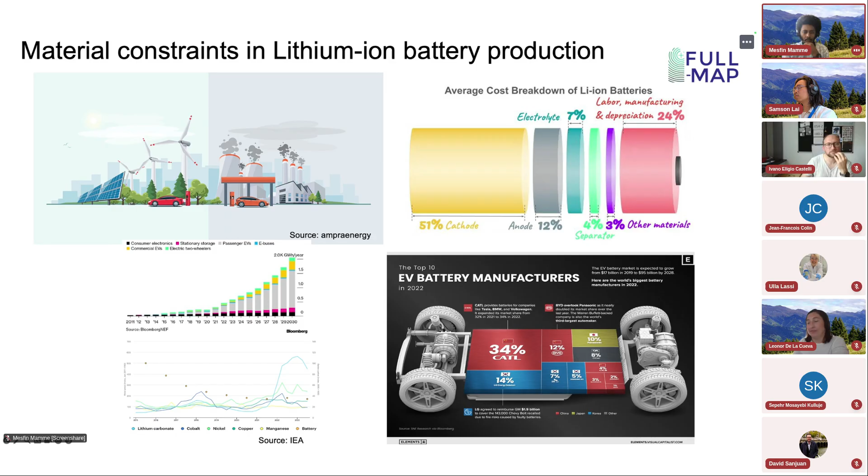And of course, this means that we have to find an alternative ultra high performance battery, but not only ultra high performance. Obviously, it should be lower cost and sustainable, very urgently. That's a really important point we are going to address in this project, or entirely in Battery 2030. And the question is how we do that.

If we follow the traditional approach, either we need to be magicians, which means basically we are lucky enough to bring a solution in a sudden way, or we should follow the trial and error approach, which is the conventional approach everyone is using, including us in our day-to-day research activity, and which costs us a lot of money as well as time. This has been already evident from many discoveries that transferred from research to industrial application, which took much longer than we anticipated.

For example, the lithium-ion battery took more than two decades from invention to commercialization, meaning that to see the next discovery, we have to wait another maybe two to three decades, which we cannot really afford. If that's the case, we have to really reinvent the way we invent this lithium-ion battery.

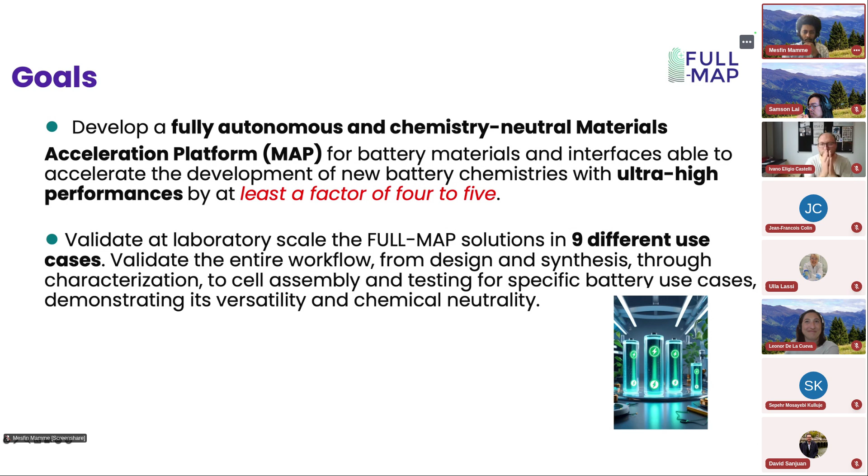Eventually, this materials acceleration platform should be generic and versatile enough, and this will be tested by different use cases in order to ensure the transferability and usefulness of this platform in general. When it comes to how to realize this, this brings us to the overall approach.

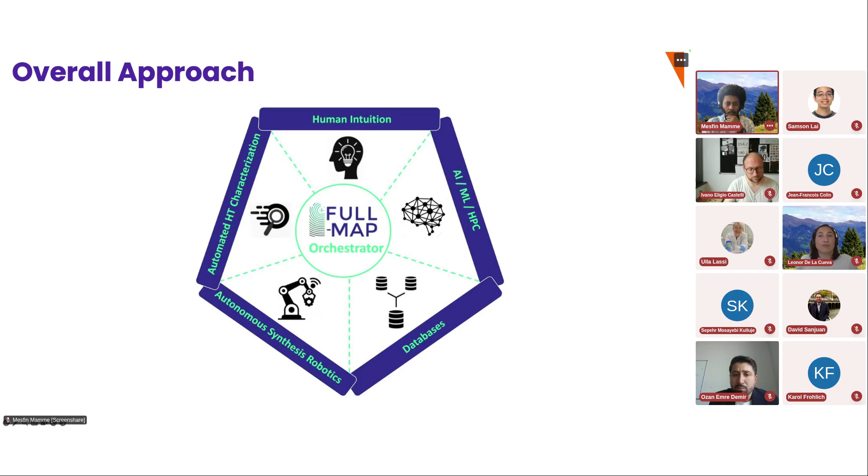As FullMap, we will develop a broad spectrum of innovative solutions in the field of AI orchestration, machine learning, computational design, modular autonomous synthesis, robotics, and advanced characterization towards a versatile, modular, fully integrated, autonomous, and chemistry-neutral materials acceleration platform. This also integrates the interoperability of data infrastructure, which is really the core part of the FullMap project. And we start by taking what has been done in the previous project called BIG-MAP.

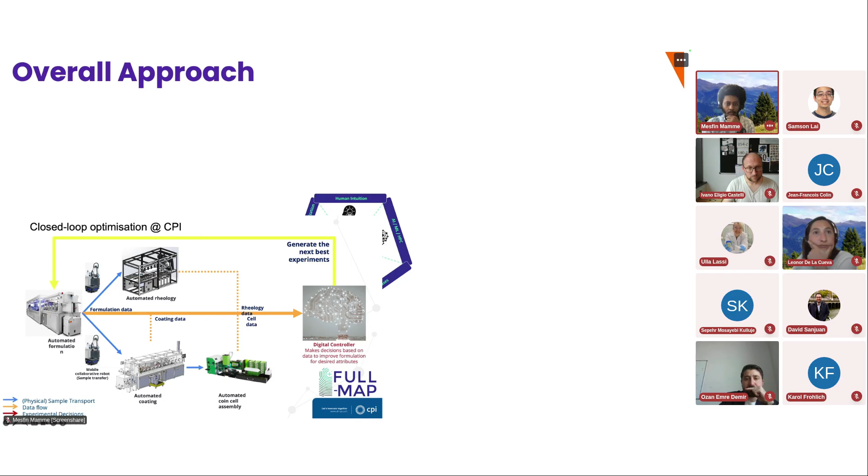So at every step, everything is done by the robot, and the data will be fed to our AI orchestrator, and the AI orchestrator will be trained and will give the next steps of the experiment for better performance. For example, here is a small movie of how it's done in reality. You have your robot and all the ingredients, and the robot is making the samples in a very fast and efficient way with minimum error.

Just to give you a perspective, with manpower you can produce one or two samples within 2 to 3 days, but in this case you can produce more than 241 samples, or formulated electrodes at different configurations, per day. So this is really fantastic. This will allow us to accelerate the process much faster.

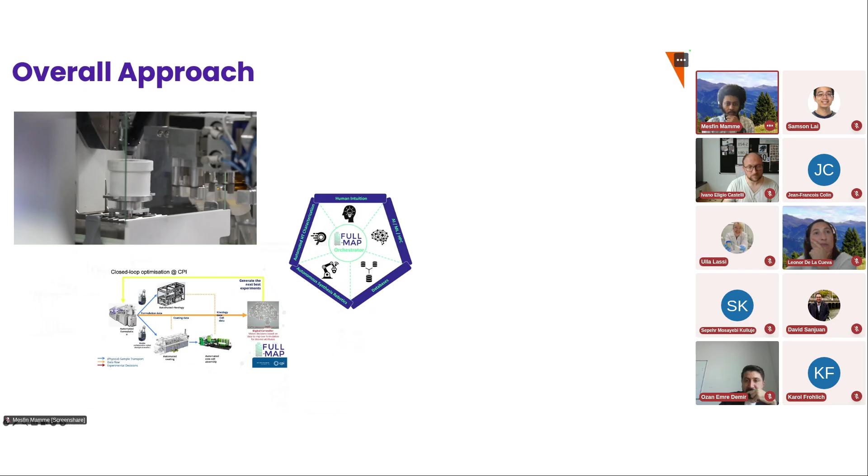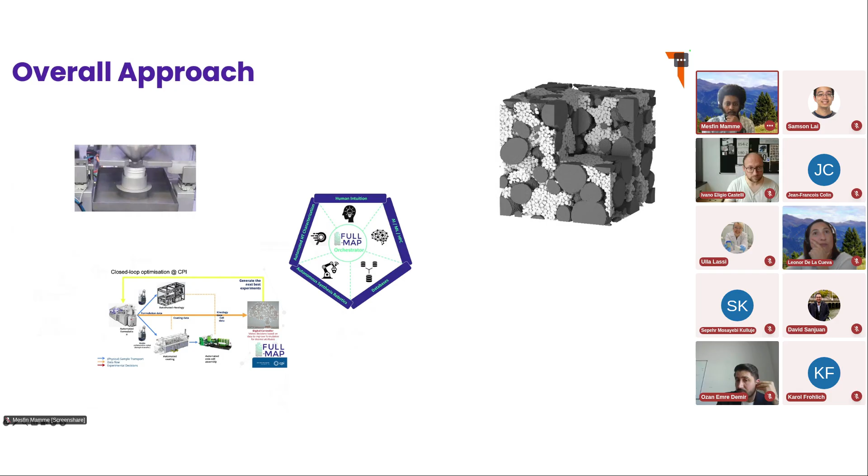At the end of the day, the idea is the AI will learn how to formulate this electrode, and eventually it will come up with a solution saying, okay, this is the performance of a certain combination of our ingredients, and then it will send a message to the robot, and the robot is going to synthesize it.

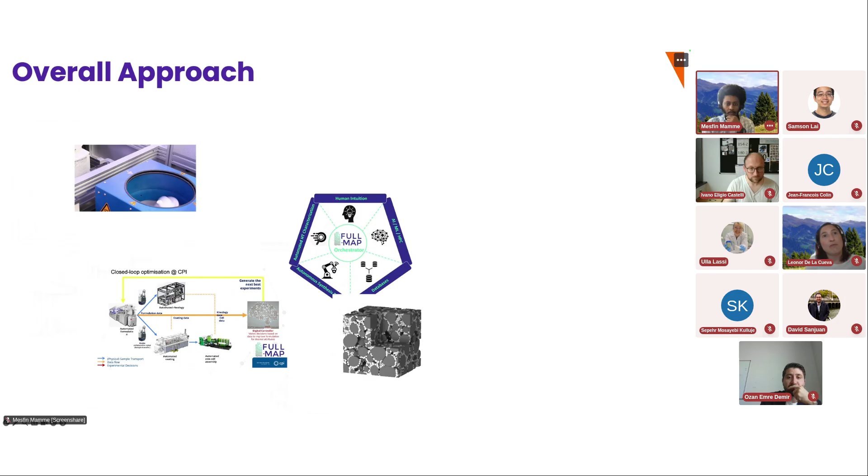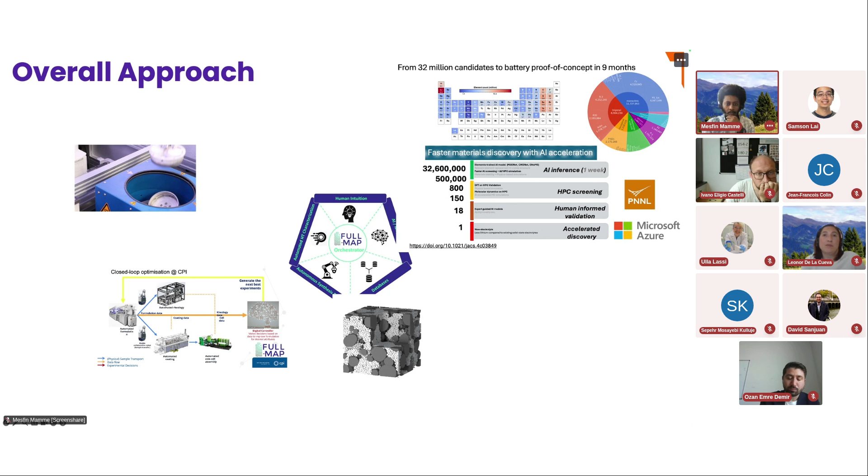On the other hand, we recently saw from a publication that by integrating this automation process with an automated simulation approach, we can come up with the best solid-state electrolyte. For example, out of 32 million, we can have these 18 candidates that are really superior to the ones we know in general. So that's the second thing we are also trying to address in this project.

On the other point, of course, we try to really combine AI, with its precision and speed, with the insights of humans.

So the idea is to use the best of the two worlds. It's not really to replace humans by robots in this project. So the ultimate goal is really to solve this critical challenge with the best approach. Of course, in order to achieve this ambitious stuff, you have to have a lot of infrastructure and a lot of people, a lot of expertise and interdisciplinary expertise, obviously.

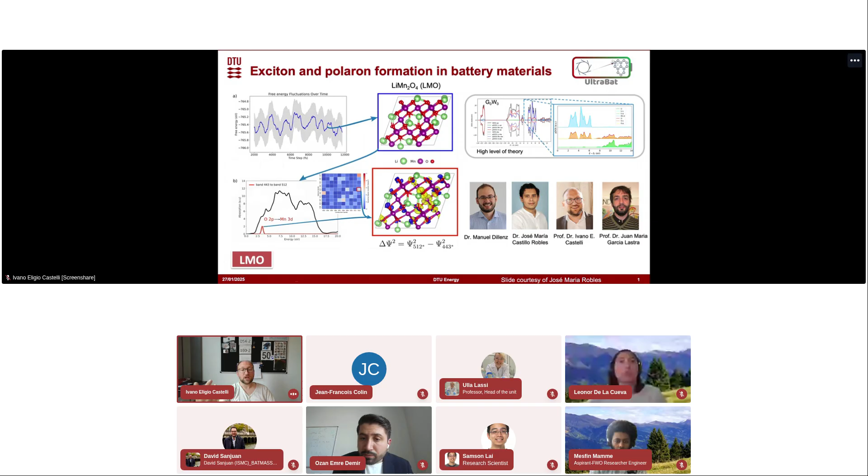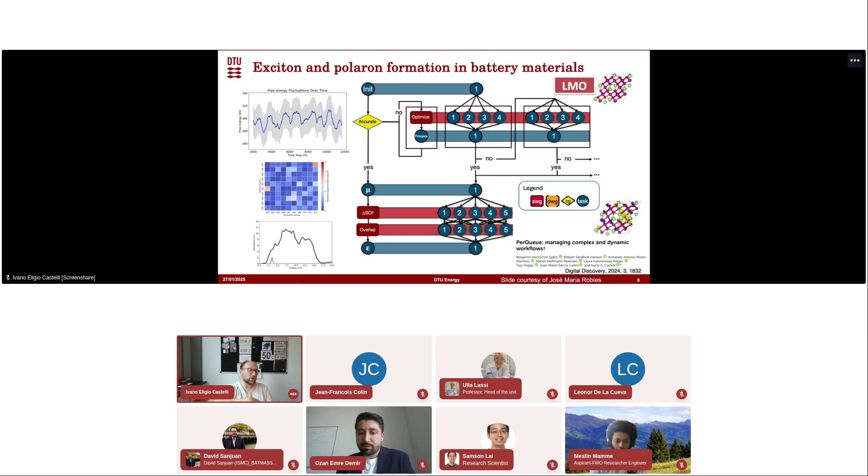And everything starts at the atomistic scale, where we do high-level density functional theory to understand how the polarons are formed and how the polarons and excitons in general move in the crystal. And to do that, we use autonomous workflow managers, which allow us to orchestrate all the simulations in an automated fashion, where we go from the most common relaxation to very advanced simulations, where we calculate how the polarons really are formed and how they move in the system.

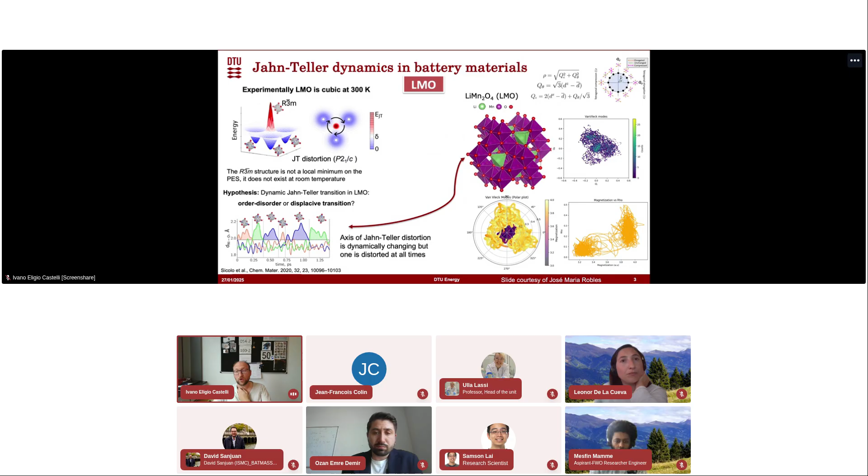Then you can look at whether there is an order-disorder or displacive transition, how the polarons change at different temperatures, what kind of charge transfer you have. So you can see here, for example, in some of the Van Vleck modes, when you go from +3 to +4 charge, you can assess whether the polaron is here or has moved somewhere else.

And then it's important that we combine this information with experimental input. For example, we can get structural information from XRD. Again, here we use very pure single crystal samples and very accurate experiments, because we want to correlate very idealized experiments with a theory that is as good as possible, right?

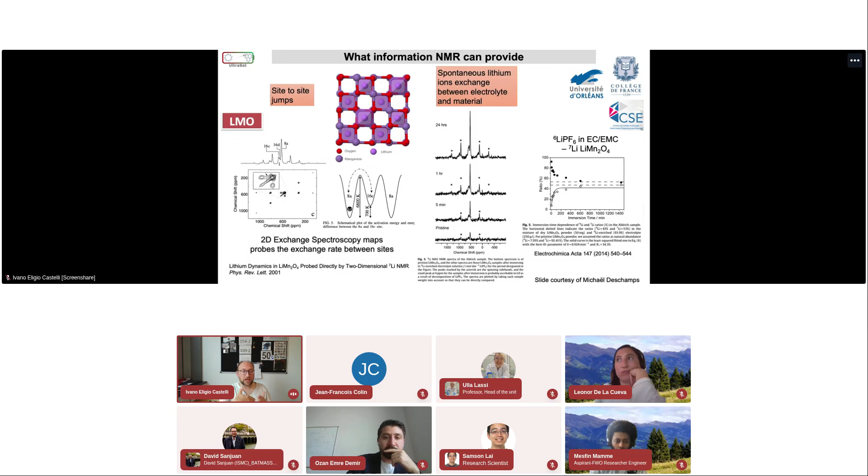And again, we can look at where the peaks of the structural information of the material are during charge and discharge, at different lithiation stages, and then directly correlate them with the theory that we are developing. We have been at beam time a few times, which allows us to really understand these fundamental properties. So here we are shifting from a more explorative project to really understanding what information about the battery interface we are missing and developing that.

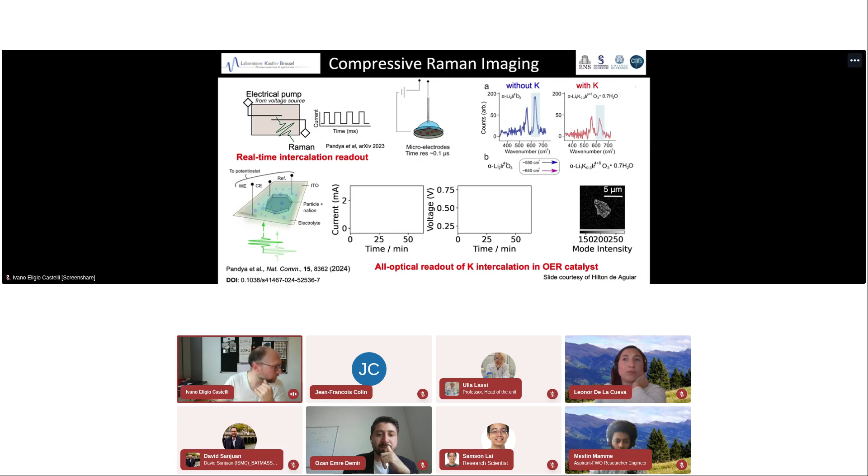Yes, of course, one of the techniques that we are using that we believe is really powerful is compressive Raman experiments, but also combined with pump probe techniques, where we inject electrons into the system and look at how the system behaves. So going beyond just charging and discharging, we're actually forcing more electrons into the system, which is a unique technique that we can use in this case and combine it again with different levels of simulation to have a one-to-one map between the two.

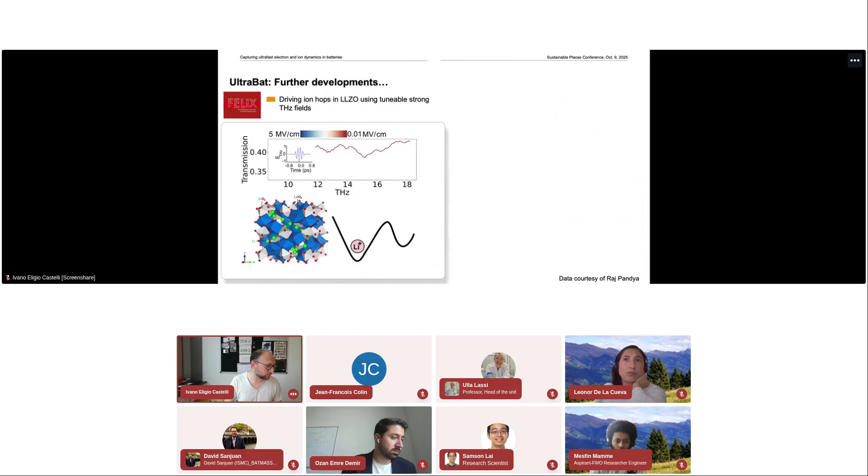Just in the interest of time, I'm skipping to here: where are we and what we want to do. So we are working on two main candidate materials, LMO and LLZO, and really trying to understand their fundamental properties. That is something that we feel is a little bit missing in the community right now. Complementing different techniques from experiments, theory, going to large-scale facilities and so on.

We have had two X-FEL beam time slots this year, so we are analyzing the results and combining them with the theory that we are developing. We have also used one of the Hop-On projects that the European Commission allows to get Peter from Slovakia involved, which is a good way to include more partners or more expertise in the project. Yes, and that's more or less it. And these are the people that are involved and have been part of the project so far.

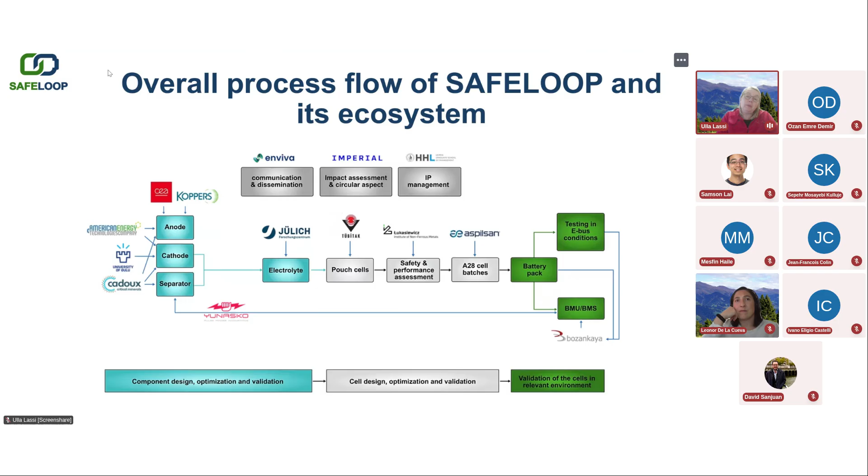There is, of course, a lot of work and coordination with the material flows, because, as you see, the whole globe is covered, from the United States, Europe and Australia. And that has been, to be honest, a challenge for the project. Material flows, and especially the lack of recycled material content, which was a little bit of a surprise during the project. Then we also have a lot of communication activities and activities related to LCA, circularity evaluation and IPR issues in the project.

Shortly speaking, one big work package in our project is related to innovative approaches in the new anode active material. Not only making the new anode active material, but also improving the performance of these anode materials. We mostly work with silicon and different conductives, like recycled graphite from spent battery cells, but there are also smaller, research-level activities on silicon powders. In the final stage of the project, we will use something like tens of kilograms of active anode material for our battery cells.

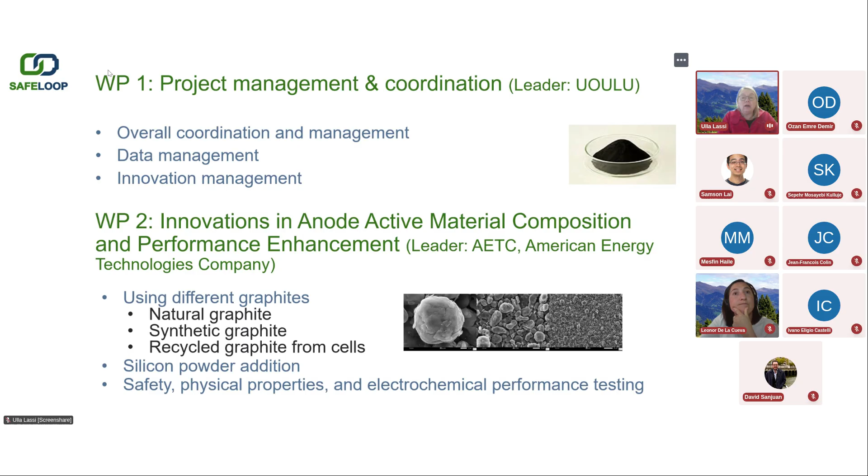Personally, I know best WP3, where we develop the cathode active materials for EVs, based on the use of recycled content in material flows. In the laboratory scale, using quite a big reactor, I would say 5 to 6 liters, we co-precipitate the precursors for batteries and then lithiate them to get the nice or less nice spherical particles. Our focus is NMC 88 chemistry, but we also use other chemistries, mostly NMC 811 as a reference material. And here we use not only recycled elements, but also conductive carbon additives, which are also materials from recycling.

One part, which is done in Germany, is focused on the electrolyte development. When we have the cathode, anode, and separator concept available, we will optimize our electrolyte system. Once again, a non-flammable electrolyte plays a key role for battery safety, and it will be tested and its stability improved with long cycling tests before this electrolyte is introduced at the final stage to the battery cells.

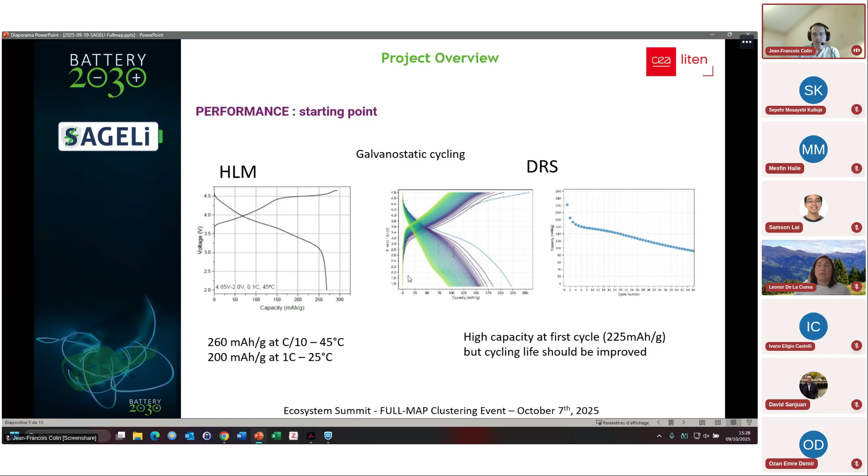Our strategy to stabilize these materials is to work on both their morphology and their surface. We know that disordered rock salts have quite diverse morphology, as you can see, and the idea is to go closer to the classical spherical agglomerates of cathode materials. The idea is to be able to have a much better coating if you have a more regular surface, and the coating will be done by ALD to assure a conformal coating and better stability of the interface between the cathode and the electrolyte.

The idea is to reduce by a factor of 3 the gassing of the material at high potential compared to NMC 811, to remove part of the fuel of the thermal runaway. Of course we have done a baseline for NMC 811. That is one of the first results of the project, as we started just this year. So we know what we have to reach now with our materials, but of course we will need to build more representative cells with our material before doing this kind of test.

We also work on binders. As I said, that's something that is often overlooked. The idea is to increase the binder adhesion coefficient and to increase also the stability of the slurry. The adhesion is important in terms of safety, because if you have bad adhesion, you can have higher resistances, and then that's where you have overcharge on part of the cathode. And the stability of the slurry is very important for the handling and the processing of the electrode, so that you can produce electrodes with good performance and good stability over the longer term.

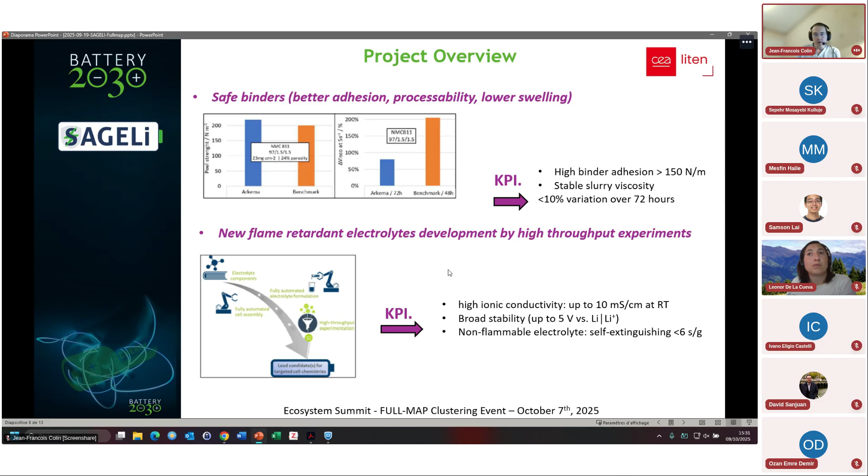So with that, we are targeting cells with different dimensions depending on the generation of material. We are targeting quite big pouch cells of 5 ampere hours for the HLM, which is the more mature material. That's already a challenge because we will have to scale up the production of ALD to above 1 kilogram scale. We have to optimize the formulation too.

And for the DRS material, it will be a 25 milliampere hour pouch cell, so it seems low, but at the moment there is no full cell known for this material, so that will be the first time we will demonstrate full cells for these materials, and we'll be able to test the safety of this material.

I'm sorry, I lost the app.

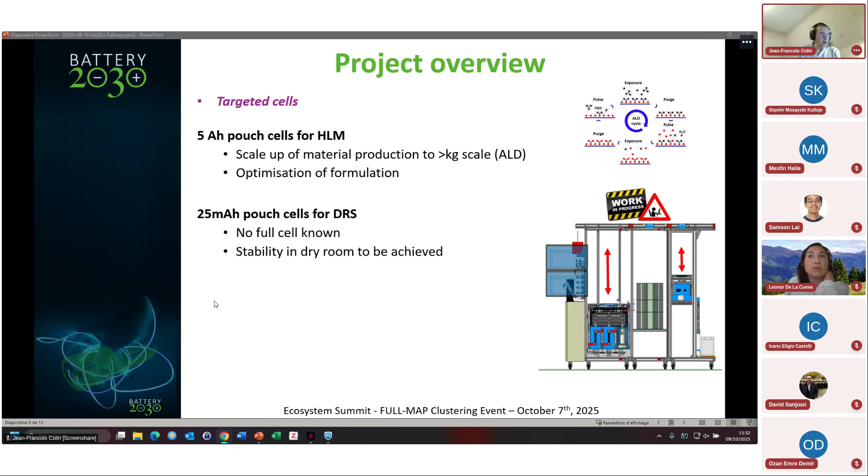Okay. And of course, there will be safety tests. So classical thermal tests, overcharge and nail penetration. What is a bit different, we will do it at different SOH. The KPI here is you have to reach a EUCAR level of 3 because we are targeting maritime and aeronautics applications, where safety is even more important than for cars.

And to help the safety prediction, we also developed tools for assessing the safety of the materials already at small scales. Usually the safety tests are done at big scales where you already have mature cells. The idea is to help the material design by having prediction tools at the material scale, so having thermal runaway tests on small amounts of materials with the equivalent of coin cells.

And this will be also supported by development of a state of safety model that will combine both safety and aging parameters to really have the idea of a state of safety at all the different steps of life of a cell.

And for that, we have the consortium expertise of the different partners. As I said, we work on the cathode, so it will be the work of CNRS, CEA, and Umicore. Binder research is done by Arkema. Electrolyte is carried by Jülich. All the safety by design and the cell making will be done by CDTech, CIC energiGUNE, and CDCells. And we also have, of course, LCA analysis. And we have different end users from maritime and aviation, Fincantieri and Safran, to help us know if we are going in the good direction.

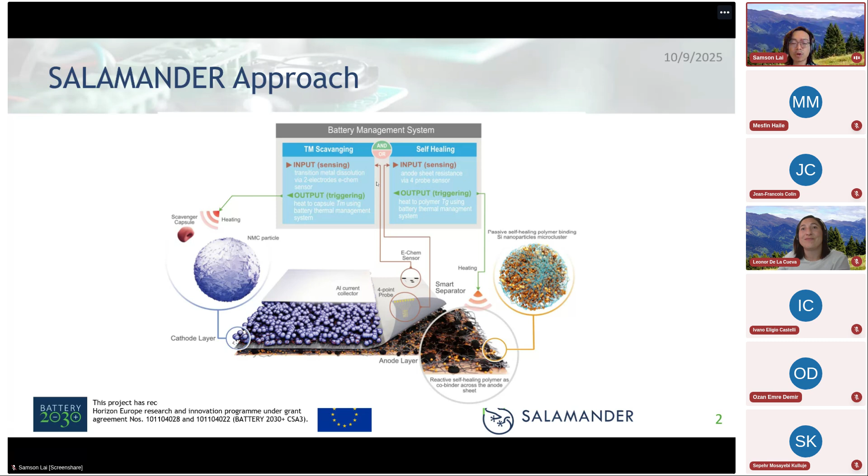Like I said, I won't have time to talk about all of those, but I think it's more interesting to talk a little bit about our results and progress on the self-healing aspects. So for the self-healing anode, as I said, we have two different polymers. One is this covalent adaptable network. This is a type of polymer that has very nice elastomeric properties. You can make films of it, and it's stretchy and things like this.

In the figure in the middle, you can see that there's a cut that's made, actually a macro scale cut. So this is optical microscopy, nothing very high resolution. But with some application of modest temperature and time, you can actually see this cut heal itself. And so the idea is this is how the polymer can heal different cracks or damage to it. And it can also be derived from bio-based materials, so we have that circularity built in. Our family is called curable polyurethane ureas with hindered urea bonds. I'll get into that a little bit later.

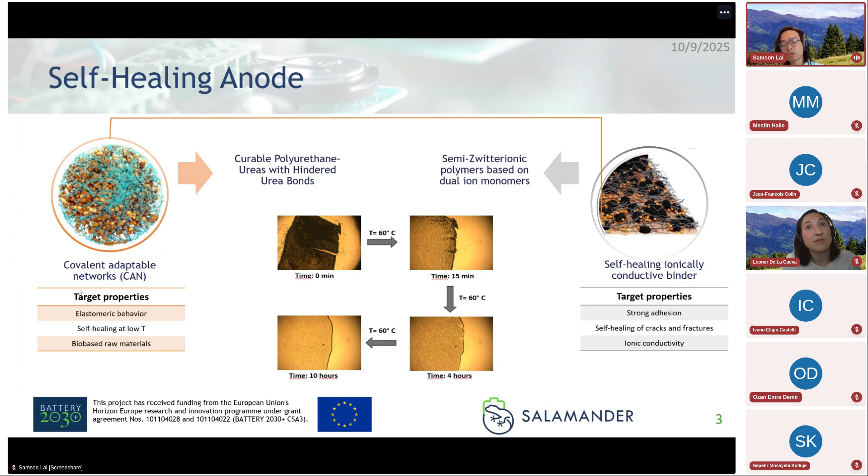The other type of polymer that we have is the semi-zwitterionic polymers. These are very similar. They have self-healing properties, but these are less temperature activated, more present throughout the entire anode. So for that first type, covalent adaptable networks, some complicated organic chemistry. You don't have to know all of this, but the main thing is that you make a long chain of this. And the key part, the self-healing part, is these hindered urea bonds, where these bonds can actually break apart, and then through the application of heat, they can reform, and that's how you get the self-healing functionality. The rest of the polymer you use for tuning the properties, making it the right viscosity, making sure it's a liquid, or cross-linking ability. You can also tune that self-healing temperature.

The other type of polymer, semi-zwitterionic, is basically made of dual ionic monomers. So it's a single polymer chain, but on that single chain you have both cationic and anionic moieties, and that's what creates these semi-zwitterionic properties. Then you can have ionic interactions between polymer chains, so these polymers can come apart, but then they can come back together, and that's how you get the self-healing properties. And again, you can tune these polymers based on chain length and these kinds of things to adjust those self-healing properties.

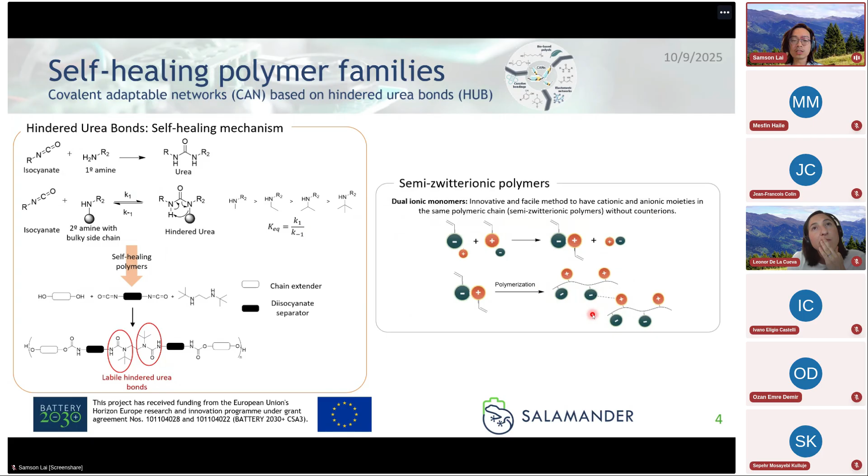So we thought, okay, we have these self-healing polymers. We've already demonstrated that they can do self-healing quite well. So it's just a matter of putting them into anodes. They're very similar to how we make binders, so let's just use that. We just replace the binder with, for example, this zwitterionic. And we got some really serious challenges, actually. We had really bad electrochemistry. The first couple cycles really died. And then we had to spend a lot of time figuring out what was going on here.

So we applied a different battery of tests. We thought, maybe it's our silicon's problem. Let's try a different silicon. So we used a commercial silicon, and we observed the same kind of degradation really fast, within 3, 4, 5 cycles. So this was really confusing to us. Let's go back to something more simple: graphite. Is it just the electrochemistry the polymers are not compatible with? And we actually found really nice graphite performance, possibly even better than what we normally get with regular binders. But our project isn't focused on graphite so much, so we haven't been able to explore this. So we thought maybe then it's volume expansion.

Silicon has this alloying ability, it creates cracks and volume expansion. So let's test another material, tin, which also has volume expansion, and can we isolate that? And we actually got a pretty normal curve of what you would expect for tin in terms of performance. So you get this gradual degradation, then a low spot, and then onward. And so that kind of explains that it wasn't the volume expansion, because this is working there.

And then when we do a graphite silicon test, maybe it's just electroconductivity. But in the end, we actually got performance basically proportional to the amount of graphite that we have. So flat, but lower based on that. So we demonstrated through all this testing and a lot of failure that the electrochemistry is working, but we're not able to really see the self-healing.

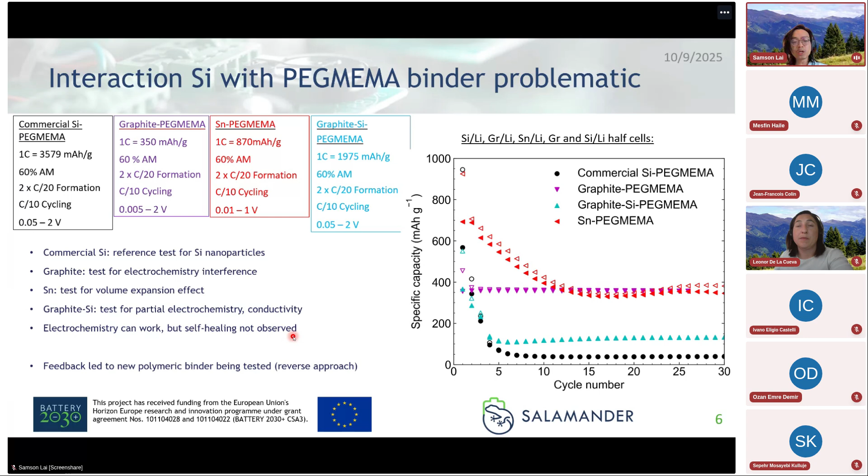So rather than having a self-healing polymer that we know has trouble with electrochemistry, we developed something that has good electrochemistry, but now the self-healing is the part that we need to tune a bit more. We had the same issue, surprisingly, with the covalent adaptable network. So a totally different type of polymer, and still the same issues. So it was really a difficult time for our project to start.

So again, using this reverse approach. We still have to see whether we can actually heal the damage and do the self-healing, but at least we've finally made some progress after a long struggle in the beginning.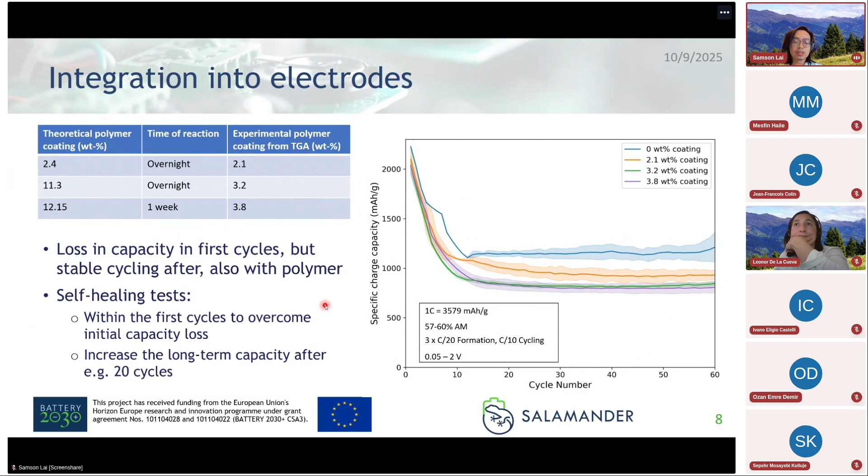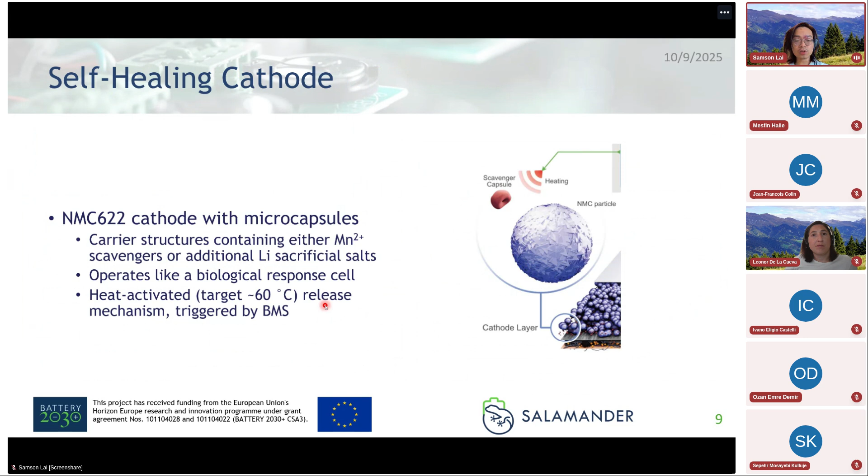On the cathode side, we set this approach using microcapsules as a platform carrying these structures. So they either have, for example, manganese scavengers to pick up dissolved manganese ions in the solution, or lithium sacrificial salts, which can be activated to increase your lithium inventory. This is a very bio-inspired design, like immune systems or platelets: they float around, and you can activate them to release the key species inside. It's a relatively straightforward wet chemistry method.

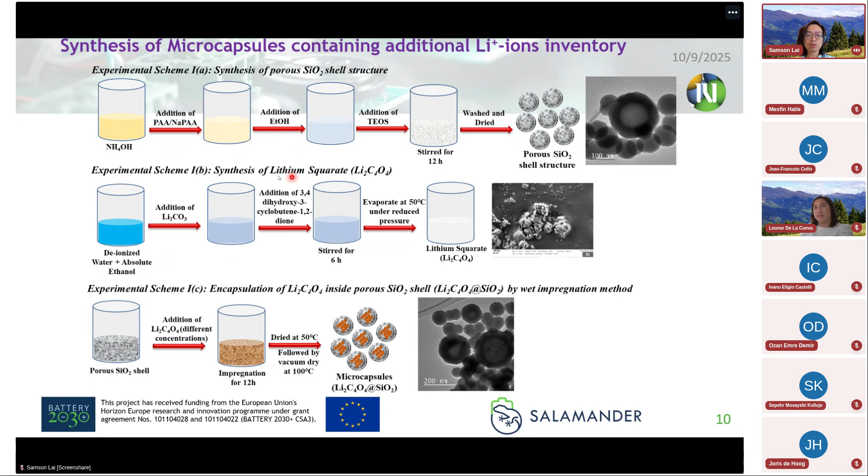We selected porous silica shells as our platform, which we can create from wet chemistry. And we chose lithium squarate as our sacrificial lithium salt. This is a pretty well-known, well-studied lithium sacrificial salt that's been used in other studies. And so we were able to load this lithium squarate inside these porous silica shells through wet impregnation, and then start to put these into a cell.

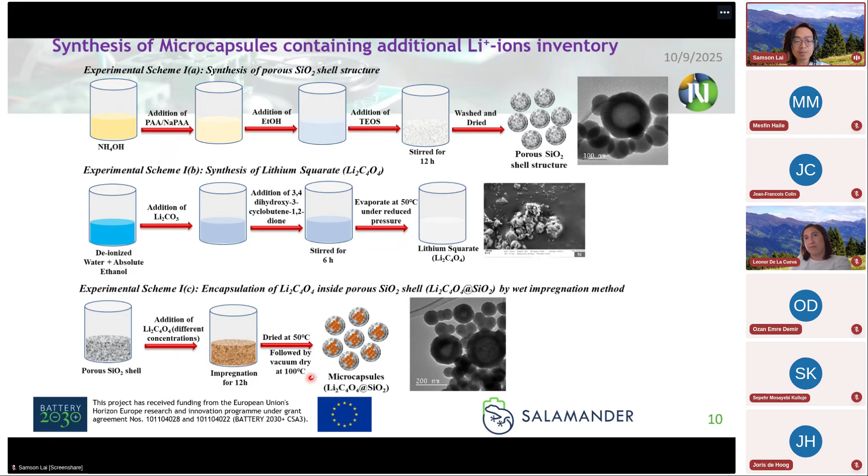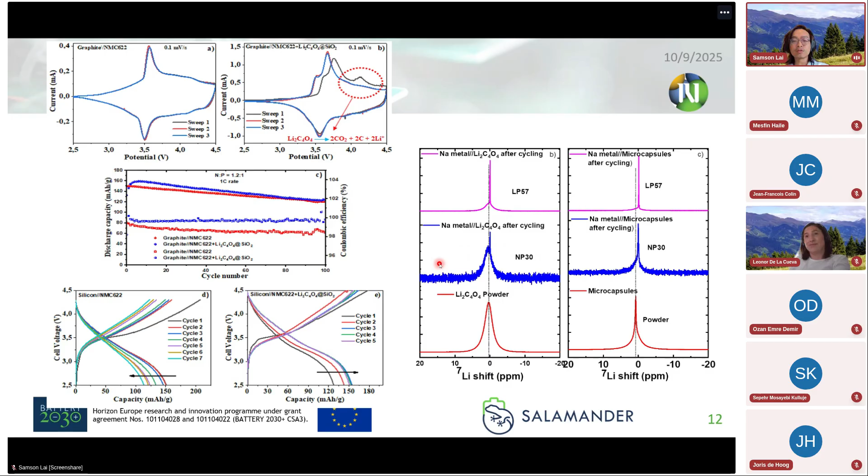Yeah, so that's been sort of the progress for our project. I know I didn't talk about everything, but I think it was probably maybe more interesting for you to see sort of the developments in our ups and downs. We developed both self-healing anodes and cathodes, but they're still, of course, work in progress. So the self-healing anodes, we've actually developed several polymer families with various tunable properties. So I think that's quite interesting.

We have developed them primarily as films, and integration with that has been challenging, but we've been able to iteratively design the polymers to make them more promising for the future. For the self-healing cathodes, we actually demonstrated this improvement enhancement, and that's been published, and it's quite a nice system, but it's still, let's say, not necessarily considered self-healing.

It has an improvement, but to really get this smart functionality we would have to have something that you can trigger on demand and tune that with, for example, some sort of sensor. So that's kind of our big challenge going forward into the future, is putting this together with a sensor inside of a cell and having that all work together with the BMS. But we still have a little bit of time left in the project, and that'll be our main target going ahead. We also have obviously learned a lot through all these challenges.

We're hoping to collaborate with Phoenix and HealingBat. We're planning some self-healing webinars, and I think this would be good for the broader community to learn about sort of what the best practices are, what have we been challenged with, and also sort of the whole concept of self-healing, which needs, I think, a bit more definition and discussion through the community to really identify what that means and how do we classify self-healing and how do we decide what we call self-healing.

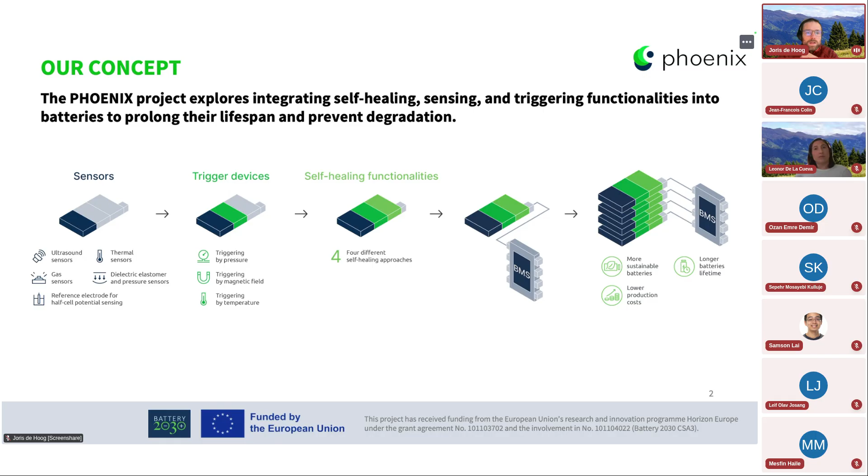So Phoenix, we're really trying to explore or to develop systems that are capable of interacting with each other, namely sensing, so battery degradation sensing, self-healing systems that are triggered, and a battery management system that oversees the entire operation. So apologies for the very blurry version of this picture, but this is the overall concept that we are developing at the moment. So you can see on the sensor side, we are working on acoustical sensors, thermal sensors, pressure sensors, gas sensors.

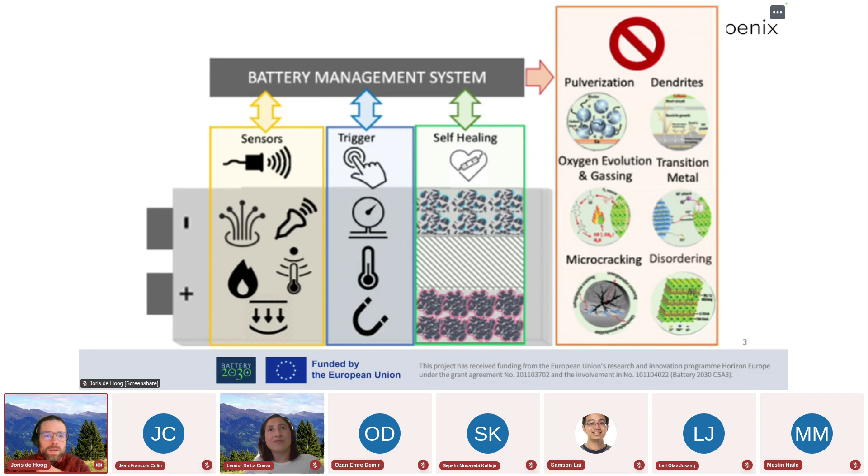Triggering of the self-healing functionalities is done by applying pressure, magnetic forces, and heat. And the self-healing is on all aspects of the batteries except for the separator. So we are developing systems for self-healing on the cathode side, anode side, and the electrolyte in order to prevent the traditional degradation phenomena that we all know. So the pulverization of silicon anodes, for example, the formation of dendrites, oxygen and gas evolution, etc.

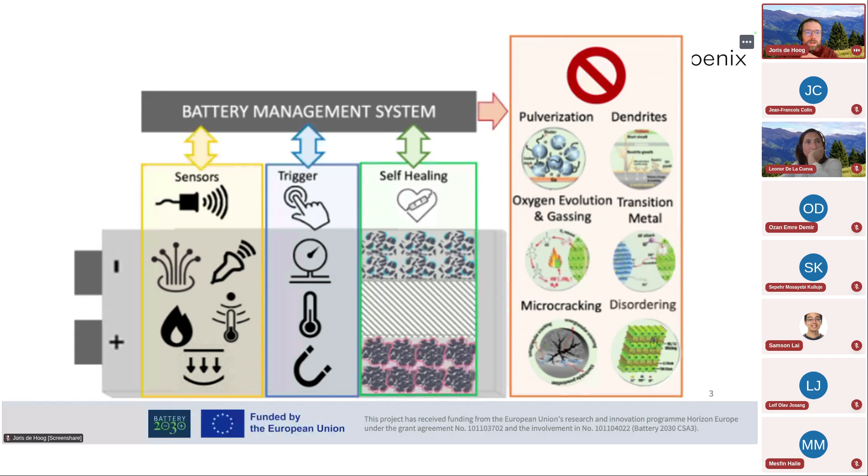So this is the overview of the strategies that we have in place and that we are currently developing within the project. So we are 18 months from the project deadline, so we have still some time. And as you can see, we are working on, let's say, 3 different types of batteries. So we are working on the traditional graphite versus NMC with liquid electrolyte batteries. So these are considered to be generation 3B, where we're mostly looking into avoiding structural changes on the cathode with high nickel contents, and the pulverization on the cathode.

Then we are also looking into generation 3B cells, but with high silicon contents on the anode, where mostly we're looking into preventing plating and the evolution of gases, and then obviously as well the structural changes.

And then finally, we're also looking into polymer electrolytes, so semi-solid state batteries with silicon anodes and NMC as a cathode. There we're mostly trying to combat the loss of active layer contact. And again, of course, because we're working with high silicon, we're also looking into, let's say, strategies to combat the structural changes.

You can see the type of self-healing strategies or self-healing systems that we have. A little bit more detail is shown in this slide. So these are the type of self-healing mechanisms that we are developing.

So on the anode side, with silicon anodes, we have developed a binder that is composed with magnetic nanoparticles inside, which we will trigger magnetically. So studies on this effectiveness are ongoing. We can also see that this magnetic trigger might have to be combined with some heating as well.

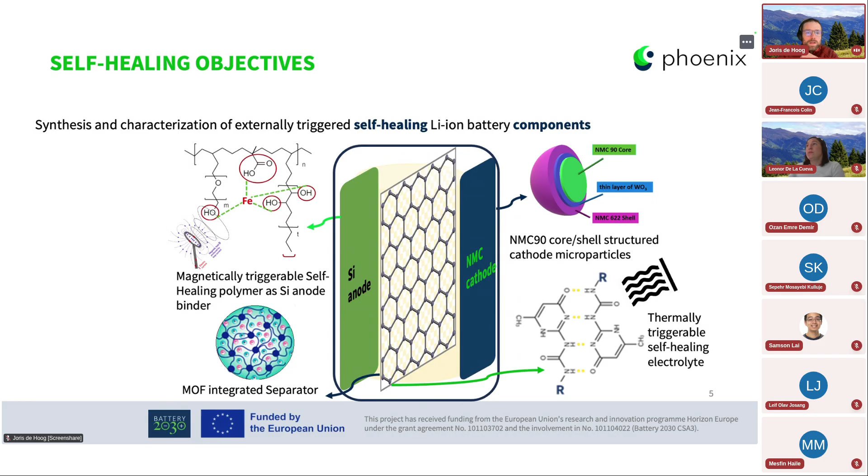Okay. And then on the strategy, because of course we have sensors, we have self-healing materials that are triggered by some sort of an external stimulus. So we need something to control this, because we are basically working on a system that is able to measure some type of degradation. It has to be quite specific on the type of degradation that it's measuring, because we need to apply specific stimuli for the self-healing to take place.

So that's why we are developing an integrated BMS, where you can see that the BMS is responsible for detecting the degradation via the sensors, and then has to decide basically what type of degradation is seen, and then also what type of trigger is being applied to the self-healing.

And so for this, we are counting on developing a BMS that is capable of doing the algorithmic calculations on board, using the sensors that are integrated in or on the cell itself, triggering the heat or the magnetic field that is built into the package of the battery system or the battery cell itself, using as best as we can off-the-shelf hardware to keep costs down and to make the system, let's say, commercially viable to a certain extent, of course. So that's a strategy.

We're not done yet. So we have, of course, some future work. For example, our material development is not fully finished yet. We are optimizing specific things like the in situ cell triggering, because at the moment we are triggering this while the cell is stationary, but we would like to see, let's say, in operando triggering of self-healing, and to measure the effects of these.

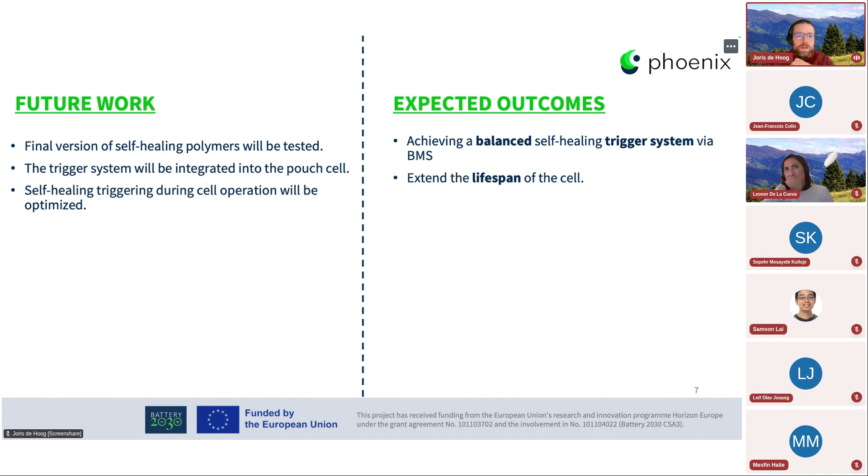This is the consortium. We are very happy with the collaboration that we have, yeah, that's it.

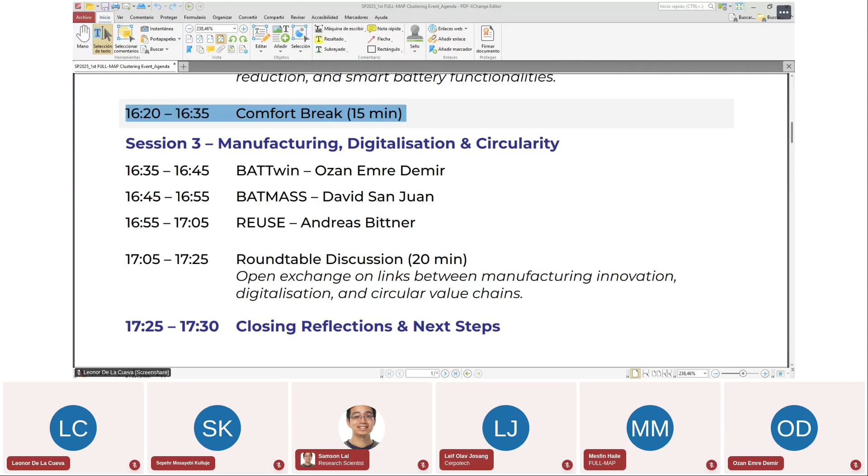Specifically, we can go through session 3, manufacturing, digitalization, and circularity. This session links the downstream phases of the battery value chain. So it groups digitalization for manufacturing, as it is done in the BATTwin project, with the core circular economy projects like BATMASS and REUSE. So the discussions can focus on how digital tools connect high yield production with efficient end of life management. So I would like to introduce the first speaker of this session, Dr. Ozan Emre Demir, Assistant Professor at the Politecnico di Milano and representative of the coordinator of the BATTwin project.

Yeah, thanks, Leonor. Can you hear me well? Yes, we can. Perfect. May I share my screen? Yes, please. I hope you can see it in the presentation mode. Let's see. Now we can see the whole PowerPoint. Maybe if you go to the presentation mode. I put it in the presentation mode, but maybe it's the same issue as before. Let me just share my entire screen. Yes, you need to share the entire screen in order to do it. Yeah.

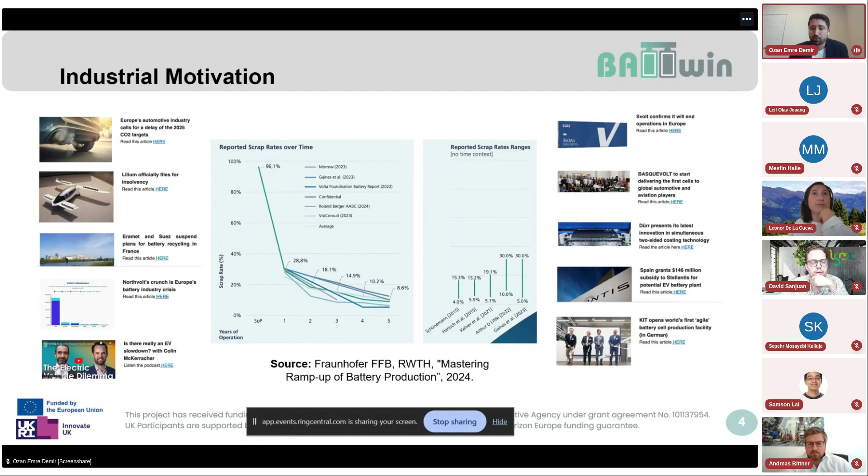So when you are producing this much scrap, of course, it also has economic drawbacks for your business plan. We have seen, for instance, in the case of Northvolt, they basically could not handle and manage the production ramp-up, and they were constantly producing scrap units. And of course, this is due to the lack of know-how in Europe, but also the complications that may arise during the ramp-up phase of any production system.

So it's a very dynamic sector, and a lot of new actors are joining. Some actors, unfortunately, are leaving. So what is the equilibrium point in this context, and what are the implications, or on the contrary, opportunities for battery manufacturers? As we well know, the battery manufacturing system is characterized by three different material flows.

Some processes, particularly mixing, are characterized by batches, then followed by a continuous flow of materials in coating, calendering, drying, until the separation phase. And after the electrode foils are cut in either slitting or notching, we have the discrete part flow. So we start building the battery stacks and go into the sealing, formation and aging processes.

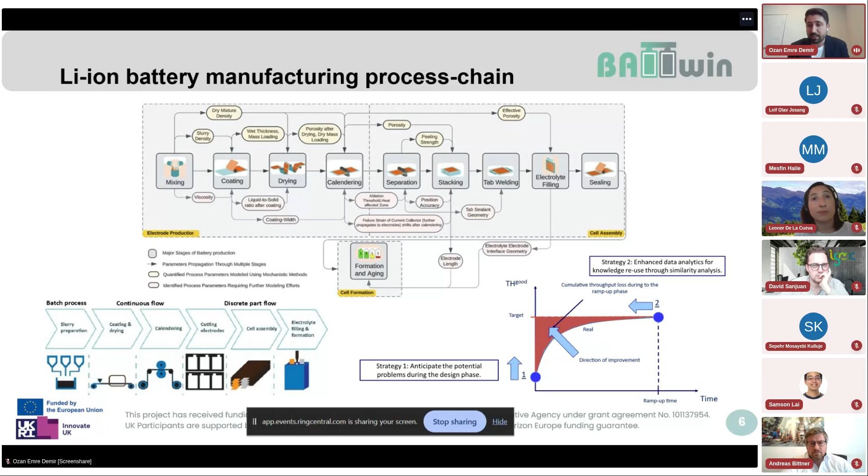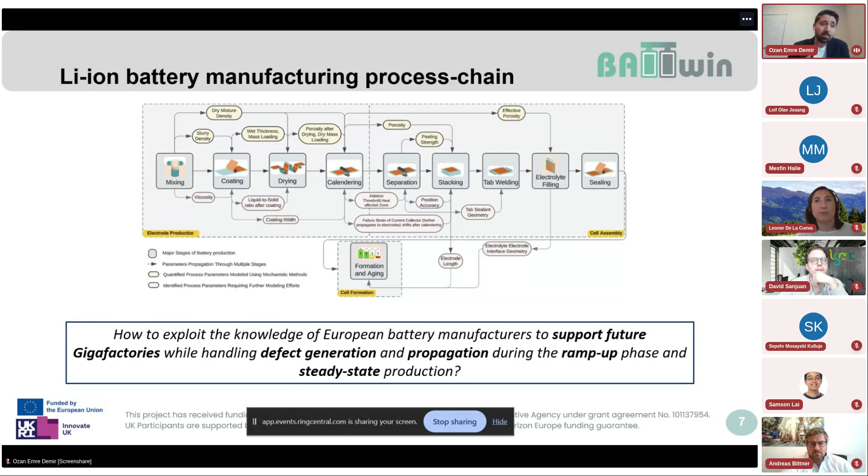Where zero defect manufacturing becomes particularly important in this context is that it is slightly different from traditional quality control mechanisms such as total quality management, lean management, Six Sigma, whatever technique you would like to use. They are mostly concentrated on defect detection and correction. So you mainly work on feedback control mechanisms.

Instead, the idea of zero defect manufacturing is to identify on the spot what has gone wrong. Although you may still be within the control limits and your part is, let's say, accepted in quality control, it may still generate problems in downstream processes because of accumulating deviations.

Therefore, zero defect manufacturing looks at the trends in real time and tries to correct what has been going wrong or slightly different than nominal in the downstream production. So you work more on the feed-forward controls. That is the essential differentiation of zero defect manufacturing with respect to the other control mechanisms.

In many industries, the products are getting more and more complex. The number of variants and the features that a product must include is getting enormously high. Of course, customization and personalization bring us the challenge of constantly adapting processes or the production systems in some cases. And of course, we need to have a certain level of traceability.

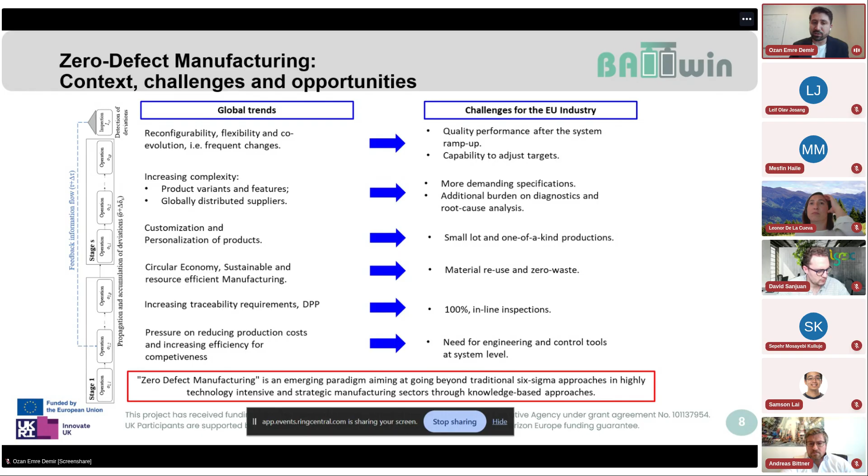Essentially in BATTwin, what we try to do is to develop a digital twin platform supporting this digitally enhanced ZDM approach for the European battery manufacturing industry. The coordinator is us, Politecnico di Milano, but we have 16 different partners, many EU member states, and now 2 UK partners as well. I will talk about this whole framework in the next slide.

How we are trying to achieve this level of complexity is that basically we collect a lot of distributed multi-source data from integrated sensors or monitoring mechanisms, and we bring all this into a single data management platform. This data management platform ingests all the heterogeneous data from diverse sources in different formats and makes them usable for the process level digital twins.

At the process level, what we typically have is multi-physics models of each single process. It could be related to mixing, coating, calendering, stacking, tab welding or notching. Anything you can imagine in a battery manufacturing line is represented by a digital model. If these digital twins can be used in real time, so the computational time is not that heavy, we continue to use them that way. If not, we apply proper order reduction techniques to extract the core of the digital twin.

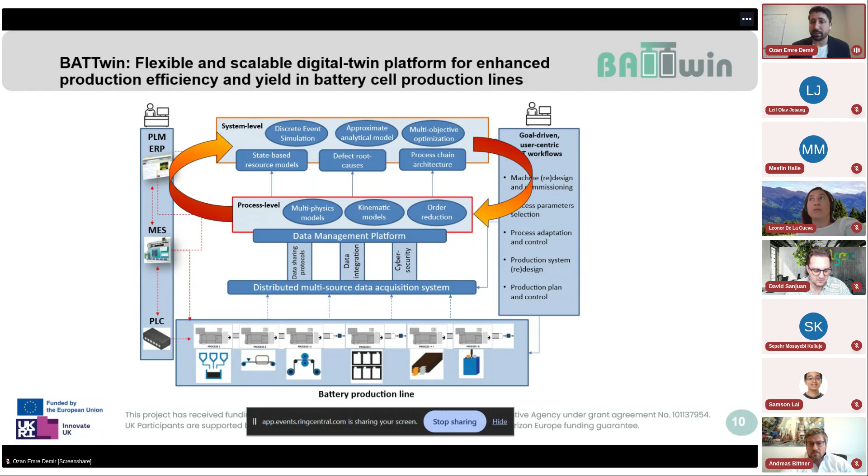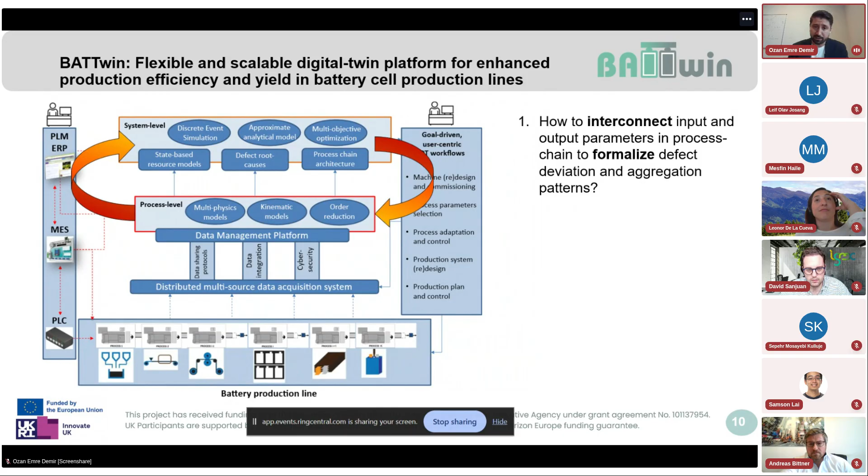One of the questions we are looking at is how to interconnect the inputs and outputs of each process to formalize the defect, deviation, and aggregation patterns, so that when a new ramp-up is happening, we can already use the existing knowledge. Second, how can we manage this distributed heterogeneous data coming from multiple sensors? What is the impact of developments at process level on system level performance in terms of productivity, quality, or logistics?

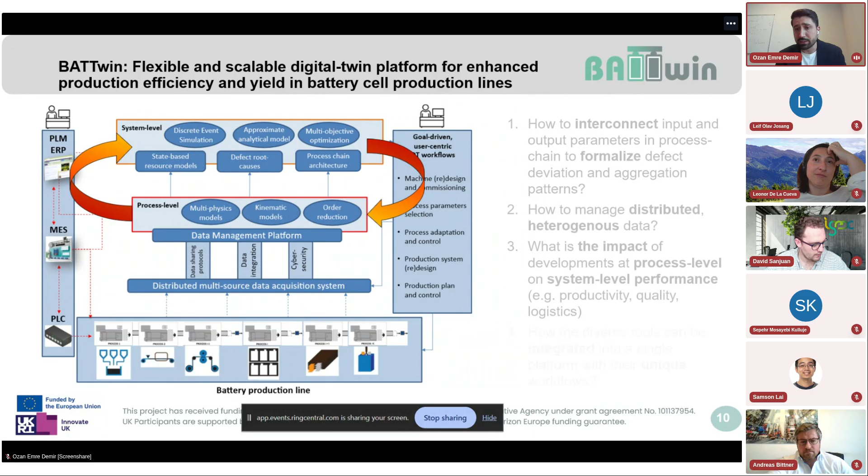And how to integrate these diverse tools into a single platform with their unique workflows. This is particularly challenging because each model has been developed in its own environment. Some come from COMSOL, some from MATLAB or ANSYS Workbench. They have to be integrated into user-centric workflows to achieve certain results, such as process adaptation, production system design, production planning and control, etc. These are the questions we would like to answer.

I'm just going to give two very short examples of what we are achieving in the meanwhile. So we have these decoupled models.

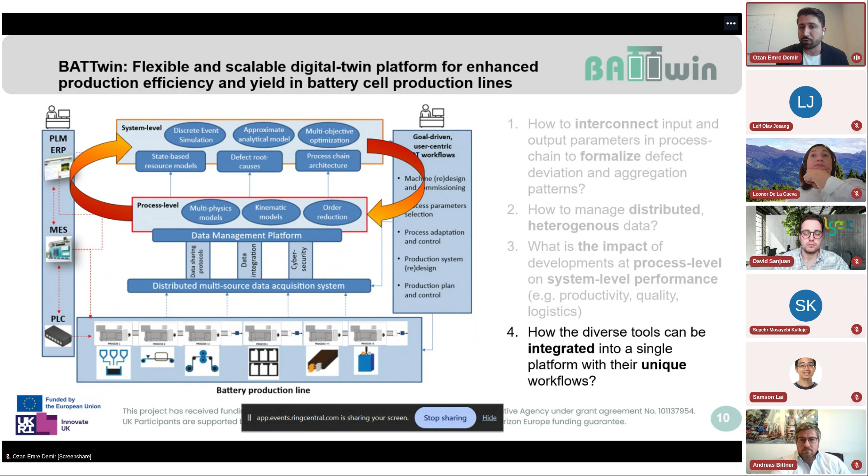And we are performing an input-output compatibility study. Then we interpret the model, unify, and in case needed, apply proper order reductions or meta-modeling techniques. Then we go into interfacing, integration, and validations.

So in the stacking example, what we have at the beginning is we are trying to invest in predicting the performance of the battery after the stacking based on the defects and deviations coming from notching and during the material handling. So here we have the gripping reduced order model. When the vacuum gripper picks up a flexible component, in this case the electrode foils, anode or cathode sheets, picked up and placed on the stack, of course the vacuum gripper applies a mechanical stress that might deform the sheet while bringing and handling the material into the stack.

The second is the robotic model, which is representing the pick and place robot. Here we are taking a look at the positional accuracy. So even if everything is flat and perfect, there will be some kinematics error coming from robotics. Therefore, we would like to also understand how these two can be combined. And we are trying to use this knowledge in feed-forward controlling of the desired trajectory of the robotic arm. So, of course, if we can estimate with a certain level of accuracy the deviation of the deformation of the sheet and displacement in the stack, then we can use it to calibrate our trajectory and apply a feed-forward control to the actual trajectory.

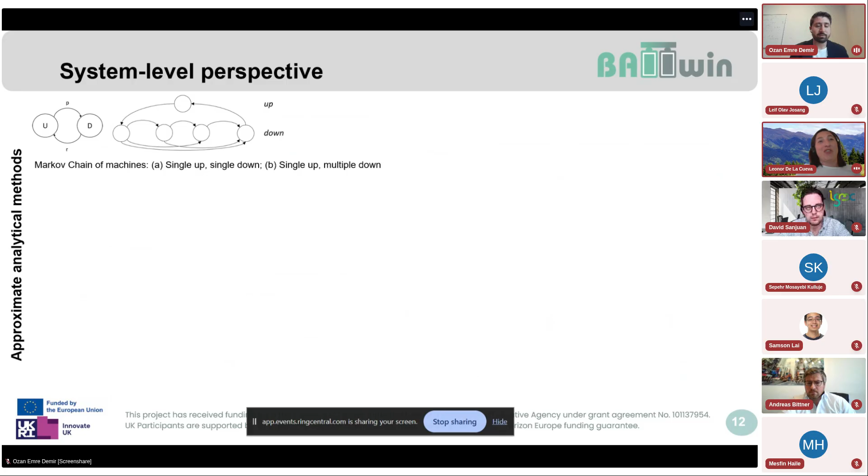Okay. Perfect. So at the system level, we have, as I said, approximate analytical methods that are more about the mathematics of the small portions of the system. And on the other side, the discrete event simulation. So we are using analytical methods, which are faster, to pre-filter some feasible scenarios, and discrete event simulation to go into more in-depth analysis in the multi-objective optimization workflow.

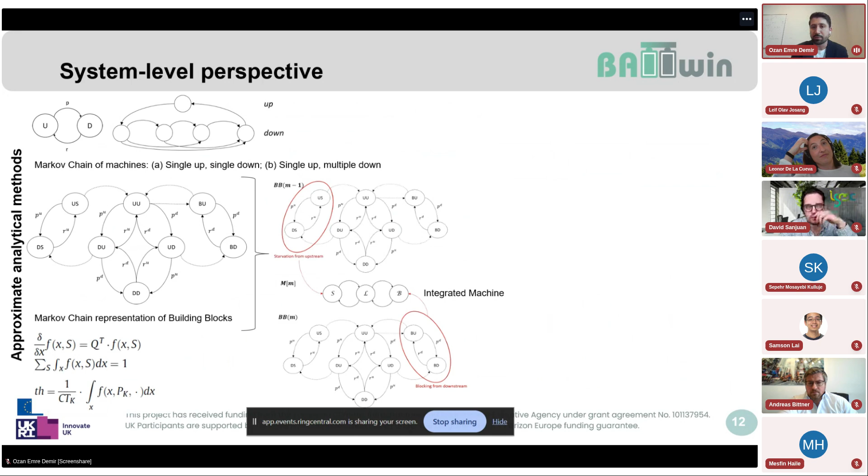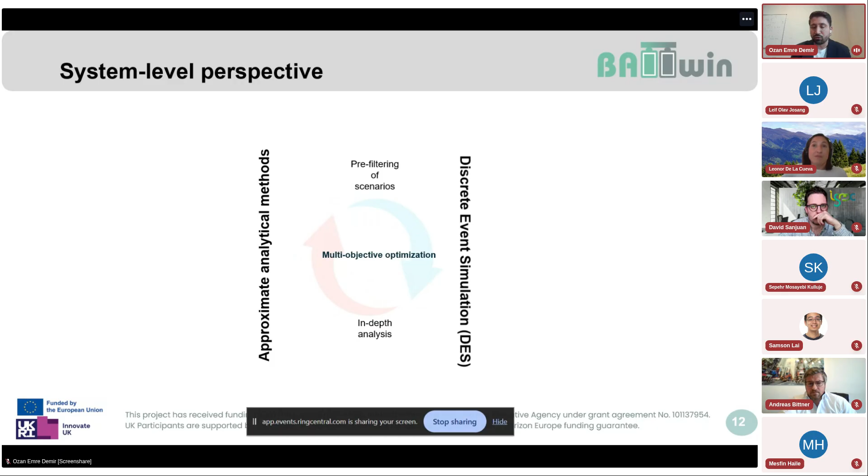So what I'm trying to say is that, of course, there is much research involved in battery manufacturing, but it is mostly isolated, targeting a single stage. But I think we should start thinking about more integrated solutions, also including the system level that completes the perspective of product and process models within the control architecture.

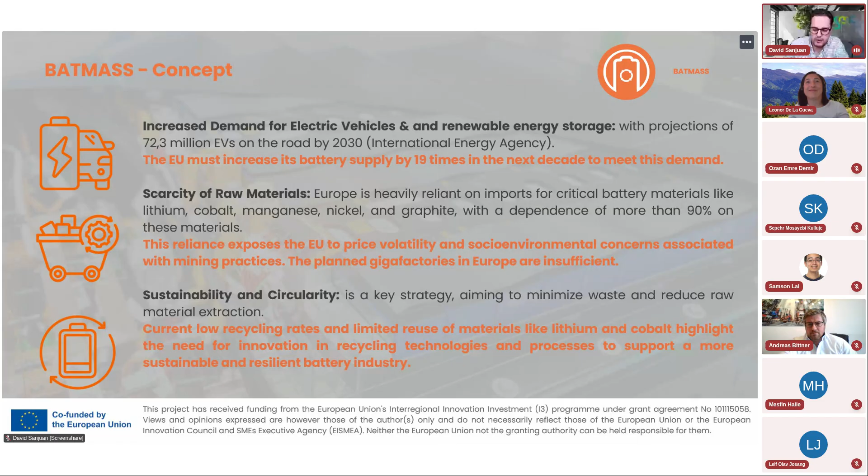The goal is a comprehensive ecosystem, the circular battery valley, that spans the whole life cycle: collection, second life, black mass recycling, and remanufacturing into new cells. The consortium mobilized an interregional network, which is quite important, of around 4 demonstrator lighthouses that scale technologies to market and de-risk investment.

The consortium is composed of 15 partners coming from 4 member states, but quite importantly it takes a look at the regional level, involving 11 regions, combining industrial players, research and technology organizations, clusters and regional actors. This mix covers the full value chain from logistics and dismantling to second life to metallurgy and manufacturing. So the results lead to bankable projects.

Taking a look at the demonstrator lighthouses, they close the material waste to production loop. The Valley relies on a collaborative triple helix approach, but also engages the investment community, with the ambition to scale and replicate the innovation strategy for European Union resilience. This is the image with which I will try to explain a little bit what the demonstrators currently are.

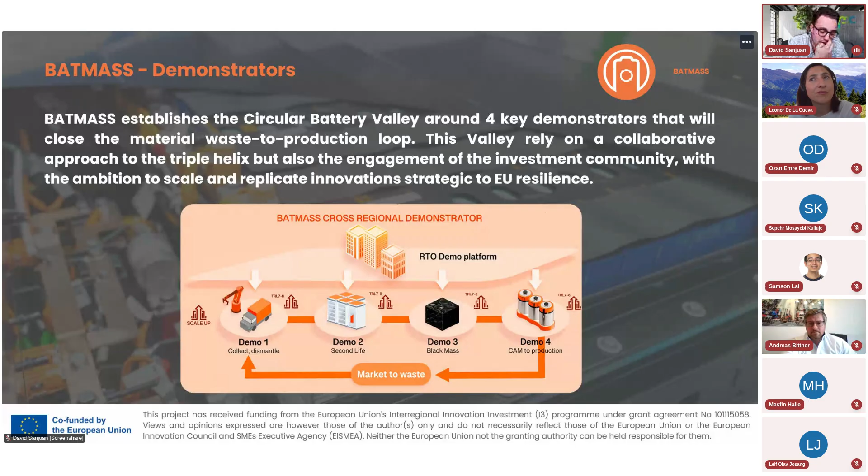The first demonstrator, which is led by ERP, is focusing on advanced logistics for battery recycling. The demo deals with one of the biggest bottlenecks, which is how to move used batteries safely, predictably, and legally across borders. The partner is currently standing up a digital operation platform and rolling out training models, starting with end-of-life rules, extended producer responsibility and REACH.

It is also testing safer packaging and a safety sensor box. It's also specifying a fire control safety box and associated sensors. When the integration point is final, the sensors will be procured and implemented.

The second demo, which is focusing on giving a second life to batteries, is led by EnviroBAT and also Visions, and it's all about reuse testing and building energy storage systems using vehicle batteries. The market, especially in residential solar, is eager for these solutions, and the feedback from the technical partners is quite positive, driven by the cost advantage of second life systems. The test bed is operational.

They are preparing key indicators for evaluating the second life application of automotive batteries. Portable, medium, and large systems are moving through development and use, and they are enriched by photos and explanations highlighting the specific technical features.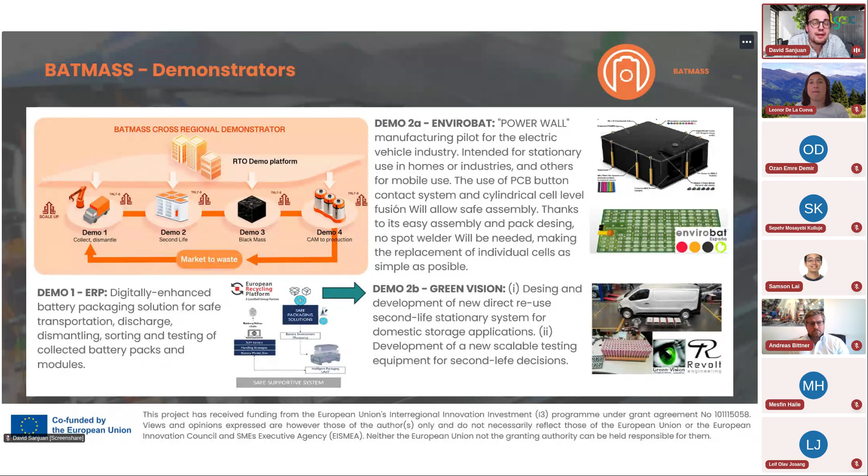The third demo, sorry for that, the third demo, which is focusing on recovering raw materials from black mass, is about turning black mass into bankable materials, the step that extracts lithium, nickel, and cobalt. The process is technically mature and already running, but the project is facing two big challenges that we will try from EISMEA to convert into policy practice for the regions. First, finding the right balance between high purity and high recovery. And secondly, the feedstock leverage.

That is quite important. And the fourth demo, which is led by Baricor, is testing new generation batteries using recycled materials. It closes the loop by feeding recycled materials into PCAM and CAM and validating new cells with recycled content. The partners are now validating how much recycled content can be used while maintaining performance. But the economics are still fragile. Recycled materials are quite expensive, and there is no clear EU demand signal for recycled content.

All of this is related, and in the final step of the project the implementation, led by Enable, goes into a circular battery valley, which is on the way to creating an association that keeps partners connected beyond the project: a one-stop ecosystem that supports new investments with sustainable business models based on membership and services.

The circular battery valley will implement it through different services or experiences, for example, matchmaking among companies, regions, and investors, capacity building training models, and also investor pitchings to accelerate market uptake.

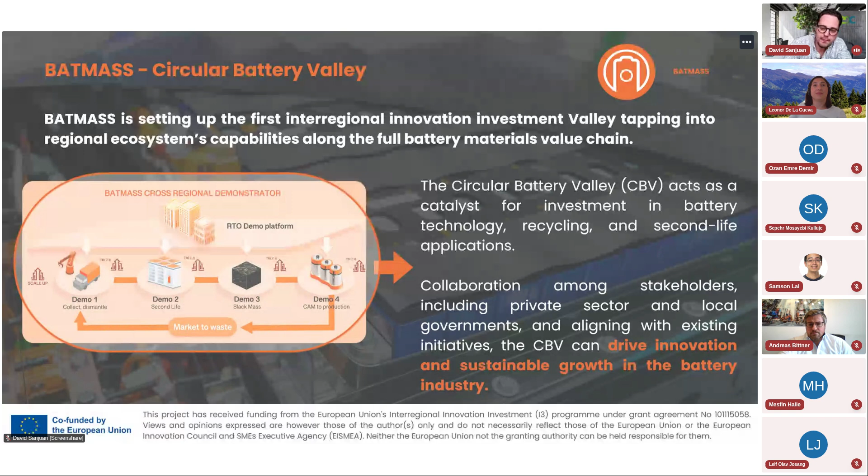So this is what, sorry for that, this is what from EISMEA we're trying to analyze. The challenge is not the objective from our side, it's how the implementation is going, considering that there are several EU regulations affecting the implementation of these projects, coming from the battery regulations, critical raw materials act, net zero industry act, which give strong demand and supply side signals. But this can only be successful if we are not only looking at the European level, but also national, regional and local level.

The regions can deliver common outputs, capacity plans, safe logistics, harmonized procedures, and also embedding that with the ongoing debate on the future budget of the European Union, how this smart specialization strategy can be integrated with all the know-how and the technical output coming from the batteries projects. And also looking at integrating resilience clauses in public procurement.

In many countries, especially Spain, they're focusing on the criteria of price to select operations. So it's important boosting and having an overview of the green impact, but also social impact of this demonstration experience. It could be quite expensive, but it's quite important to have a global overview of that.

Wait a minute. And for the policy practice area of the EU investments, sorry for that, we are looking at the different barriers that demonstrations are facing. First is make cross-border transport predictable. Recycling can't scale if we cannot move batteries, and we need one predictable approach and fully digital notification that removes friction and keeps safety high.

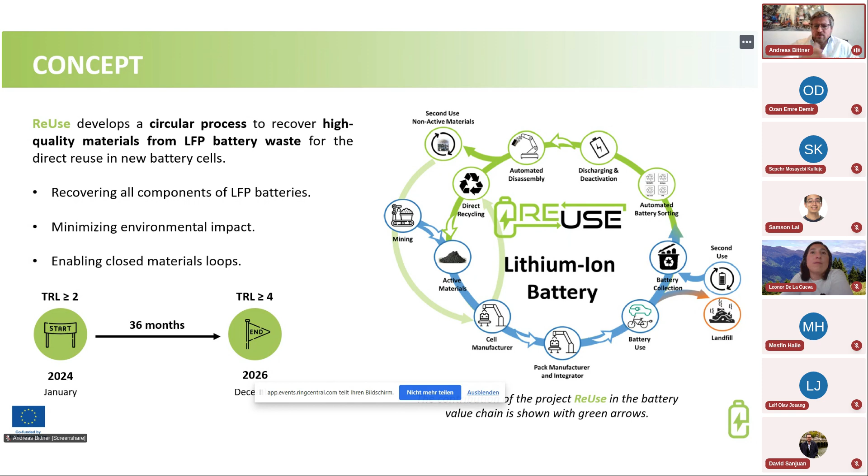The big goal of Reuse is to develop sustainable, low energy and scalable processes for LFP battery recycling to ensure high recycling efficiencies and high purities of the recovered materials, to be able to use them for battery cell production and to fulfill and overfulfill all future requirements of the EU batteries regulation.

And to make this possible, we are developing automated end-of-life battery sorting processes. We are developing automated battery cell disassembly processes. Then we are developing efficient separation, purification, and regeneration methods to recover ready-to-use battery active materials, carbon black, binder, and also the different electrolyte components.

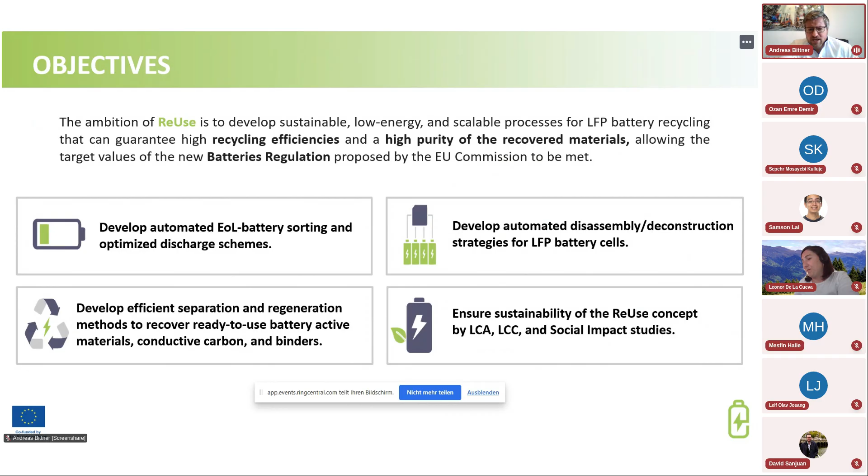And with my next slides, I want to give you a short overview of our key process steps in ReUse. The first step is the battery preparation. And herefore, we are working on AI-supported sorting processes to extract LFP battery cells out of battery cell mixtures that include, for example, also NMC cells. Then we are working on universal methods for discharging that are not harming the materials, that are cost efficient and scalable. And we are working on new deactivation methods, for example, in protective atmosphere to make sure that we have no explosion, to ensure that we have a safe handling of the batteries.

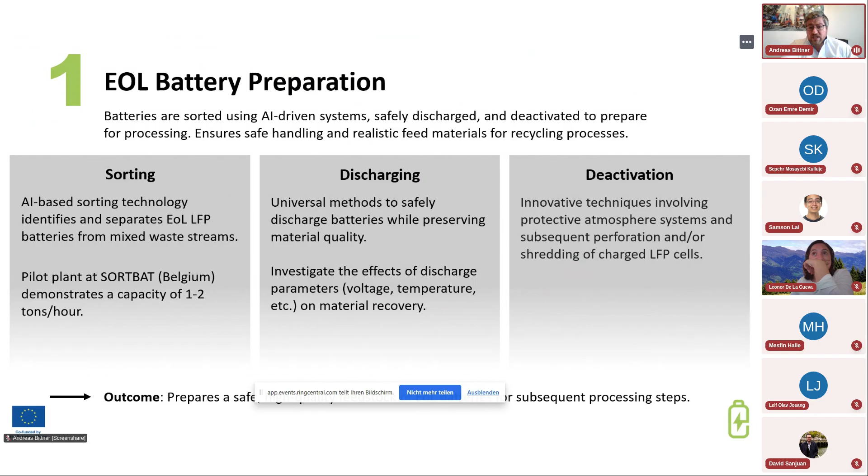The next step is the disassembly and the material or component separation. Herefore, we have two routes. The first route is the automated battery cell disassembly that includes the opening of the battery cell housing, the extraction of the electrode wraps, and then the delamination, the unfolding of the electrode wraps. The second approach is a material selective shredding with an adjusted shredding configuration that enables the recovery of anode concentrates and of cathode concentrates to also use the shredding approach for direct recycling. And both of these routes include also the recovery of the electrolyte solvent and of the electrolyte lithium salt, LiPF6.

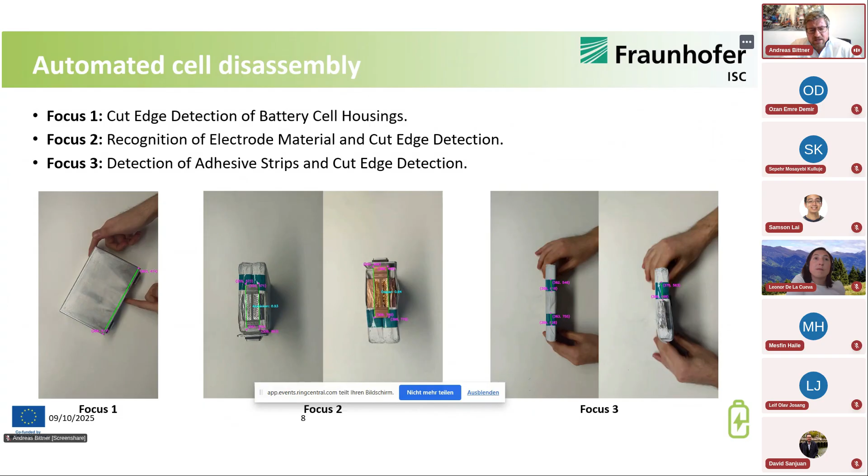A nice example by Fraunhofer. The first step in our automated cell disassembly process is the opening of the battery cells and the extraction of the electrode wraps. And you can see in focus 1 the cutting line in green that is automatically adjusted when the cell is moved. Focus 2 shows the second step, the extraction of the electrode wrap out of the compound. And herefore we have to cut the connection between the copper and aluminum current collectors and the respective copper and aluminum pads. Also here you see the green cutting line. And focus 3 then shows the last step, the cutting of these small glue stripes to be able to unfold electrode wraps in subsequent steps that are also automated.

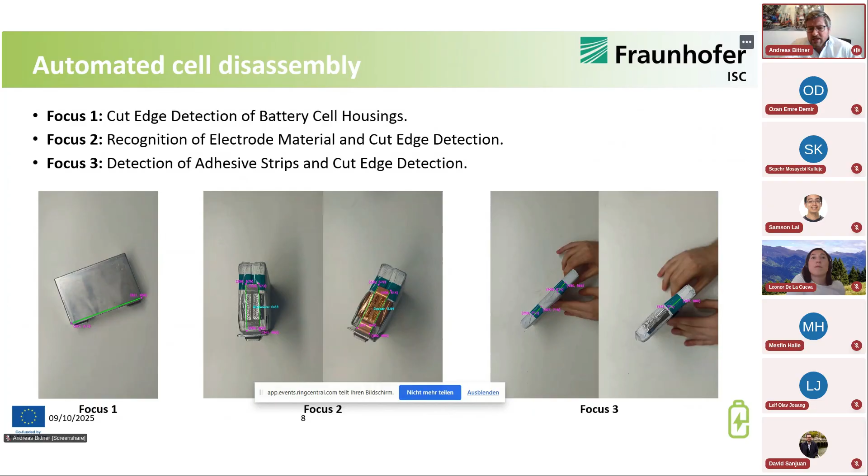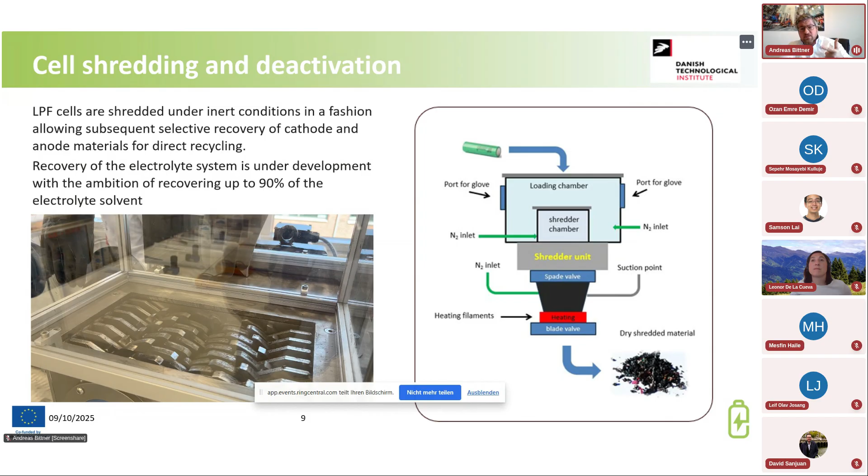Third step is the delamination, extraction, and purification. Here we have an electrode delamination based on a liquid approach, for example, delamination with water. And this enables very high recovery rates, very high purities that are needed for the direct recycling. We also work on electrolyte recovery with solvent extraction and vacuum distillation approach. We are recovering binder also via solvent-based approaches, for example, in a Soxhlet process, optionally supported by ultrasonication. And last but not least, we are even able to separate the active materials from the carbon black with a semi-continuous centrifugation process.

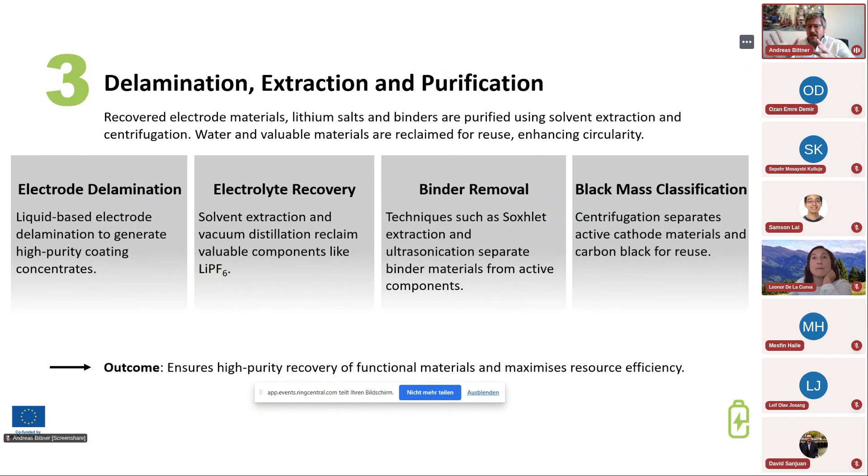The last step in our process chain is the materials regeneration. So we are regenerating both the cathode and the anode materials. For the cathode active materials, we are using microwave-assisted hydrothermal and dry annealing methods that use low energies, and we are also using electrochemical methods for relithiation. For the anode active material regeneration, we have a hybrid process that includes washing and thermal treatment. For both of these processes, we are optimizing them regarding energy efficiency, cost efficiency, scalability.

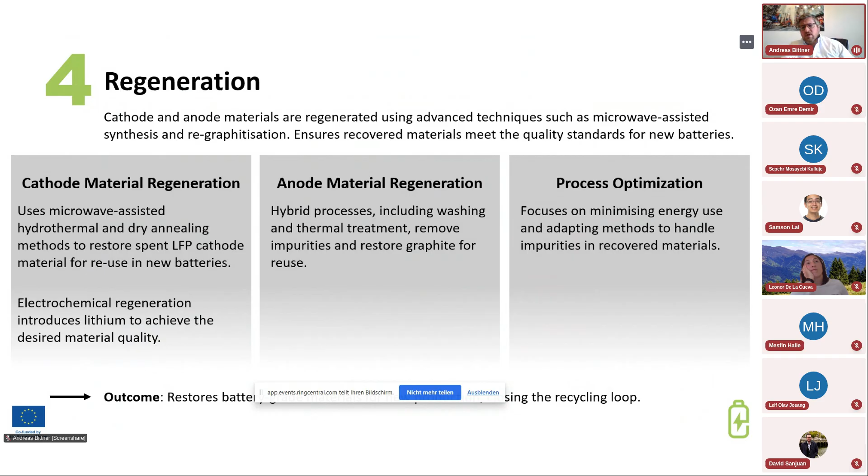A nice example is shown here from our partner VITO for the cathode active material regeneration based on different pre-treatment options, either via ultrasonication or via liquid-based debindering and materials deagglomeration. You can see on the right hand that we have achieved a very good healing of the LFP active materials with these process steps.

The black XRD pattern shows the initial material from end-of-life batteries, and in addition to the LFP, you can see the peaks for the iron phosphate impurities. In red and blue, you can see the XRD patterns of our regenerated materials. They only have the peaks for the pure LFP, which demonstrates a successful process. An even further improved process has already been filed for patent.

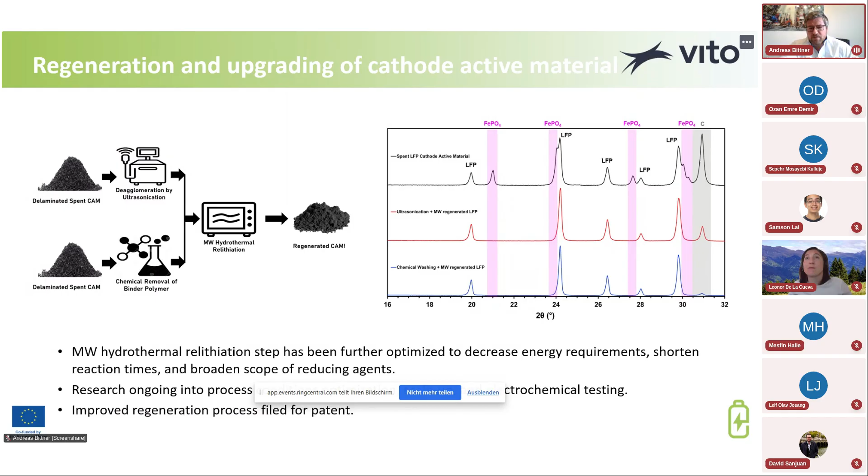As a next step, building on our innovative ReUse project, we are further upscaling the process, and our company CellCircle has already initiated respective steps with the goal to achieve an industrial pilot production already in 2027 with a capacity of approximately 500 tons per year, followed by further process rollout all over Europe to make a strong impact to a sustainable European battery value chain.

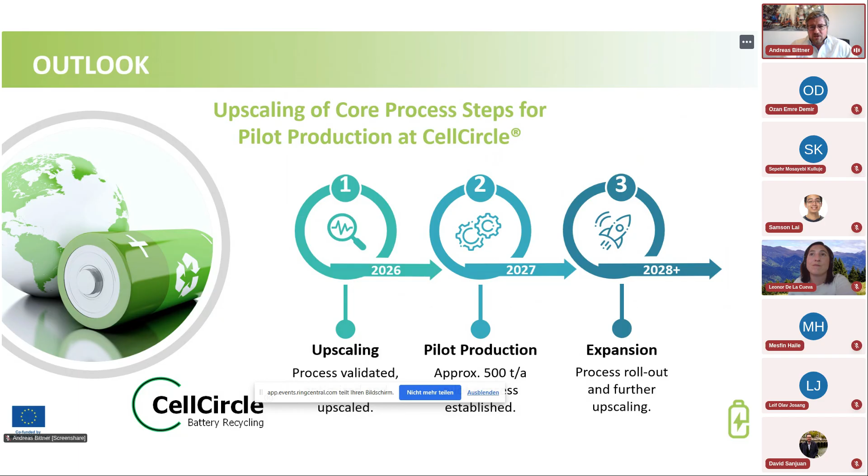So, well, let's go to the roundtable discussion. I don't know if someone would like to start making some questions or exploring different collaboration pathways. Okay. Yes, Andreas, please. Yeah, I can start.

So first of all, many thanks to our fellow projects, BATT4EU, BATTWIN, very nice presentations, interesting activities. So I already see a lot of synergies. For example, one could transfer this nice digital twin approach to our direct battery recycling process in ReUse. And also we could use our innovative battery cell sorting process for the demo plant 1. So I'm happy to discuss joint opportunities in the future, and look forward to follow-up activities.

Yeah, absolutely. I think that David is also really interested in this kind of collaboration because I have talked with him before, but unfortunately he needs to leave. But for sure, I think that this is really interesting.

I have a question. Maybe it's because of my misunderstanding concerning the part of the digital twin. I'm not sure about the similarities of the manufacturing process between, for example, different cell chemistries or cell geometries, even cell manufacturing processes between different companies. So I don't know how this digital twin for zero manufacturing could be applied to all these different scenarios, if it is transferable.